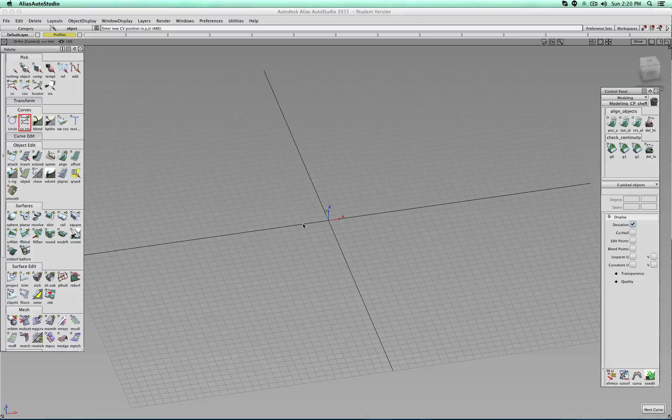I'm going to create myself a new layer. I call this one Profiles. And for example, set this one to orthographic. I go to the CV curve, degree 2. No, I go with 3. Okay. And then maybe Alt click and a side view.

There's my vessel. Then actually I can go ahead and maybe change those a little bit. Sculpt this one out a little bit more. Currently I'm in 10 millimeters, so I can use the grid kind of like as a reference. And maybe this one for convenience and snapping to the grid. Perfect. And then I have to reset my pivot point, for example here, and then I can actually do a revolve.

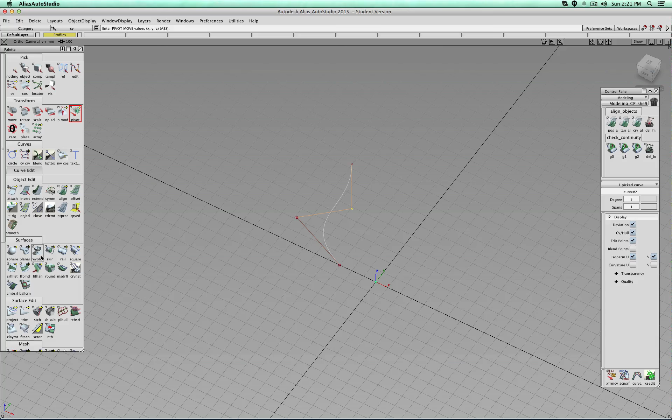There, Z and local axes. Let's take a look. There's the part. Maybe I should sculpt actually the shapes a little bit more. This, for example, if you see, is maybe a little bit higher. So let's stretch this one out. This one maybe, for example, is inwards a little bit more. There. And this one maybe we move up a little bit as well to there.

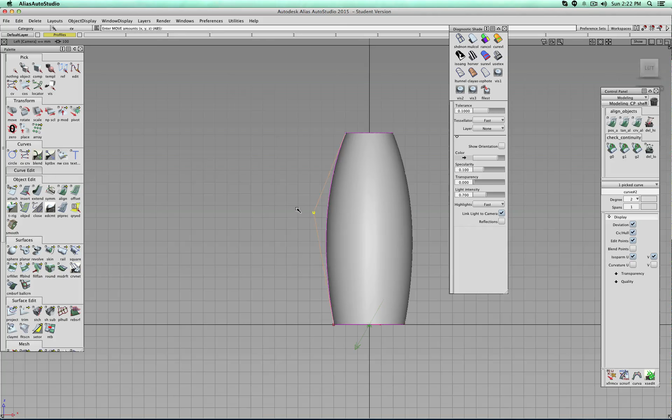This one is actually a sharp corner. I simply decide to up here have a nicer transition. If, for example, you don't want that, well then just change the degree to degree 2. You see, that's really nice. Changing the degrees, simplifying the shape, and then just then resculpting.

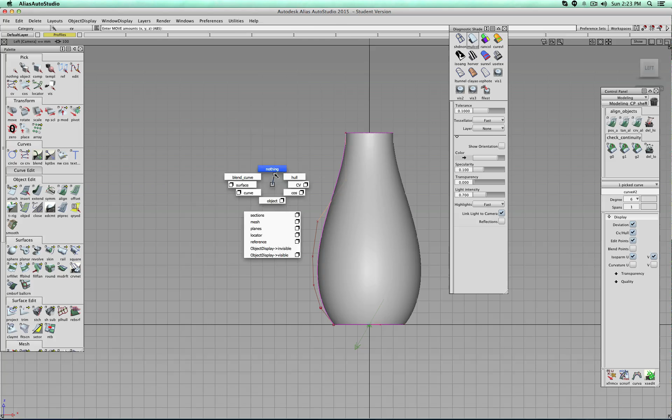At this point, actually, I would like to introduce you also to the idea that once, for example, you have a curve like this one, and you change it to a higher degree, you see it redraws the same curve, and you get more control points. So, for example, the lower part is the same. If, for example, I do it this way, and then I could, for example, click on this curve, move, maybe snap it. So you see now I changed just upper part, and because I changed the degree afterwards, this curvature remains exactly the same.

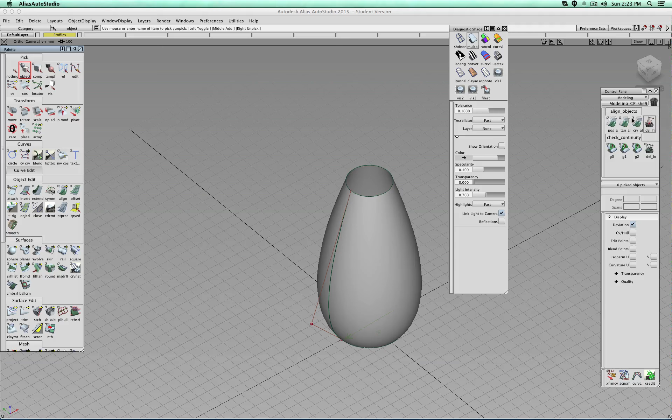But actually, let's go back to maybe this one. Okay. Now, this is actually maybe okay for the moment. Let's take a look at the top. So to quickly get an idea how this one might look like, I control click on this path, go up, go to the side, go to the side, and always snapped to the grid. Well, maybe degree 4, single span, accept. Just have to rearrange some of those points.

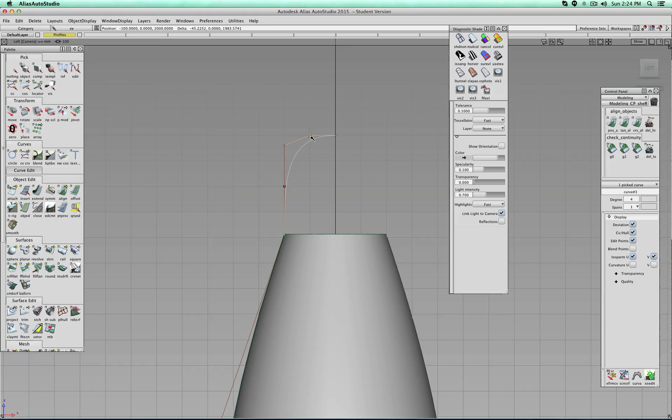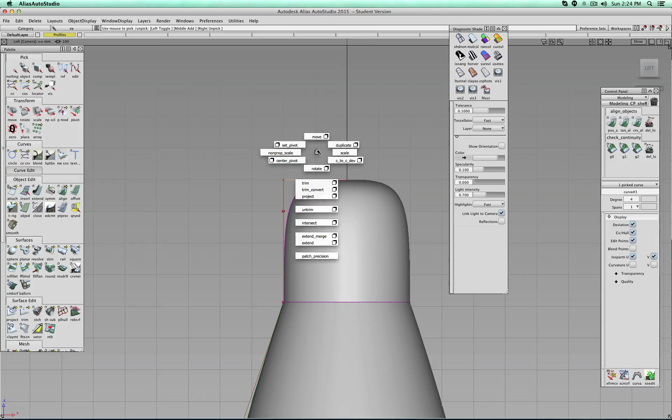So I just made a really rough mock-up of a cap. I have to set the pivot point here as well. There, revolve, spacebar, check the surface, and maybe to get some ideas I could sculpt this a little bit more. See, I'm tightening the corner, I'm stretching, flattening those lines.

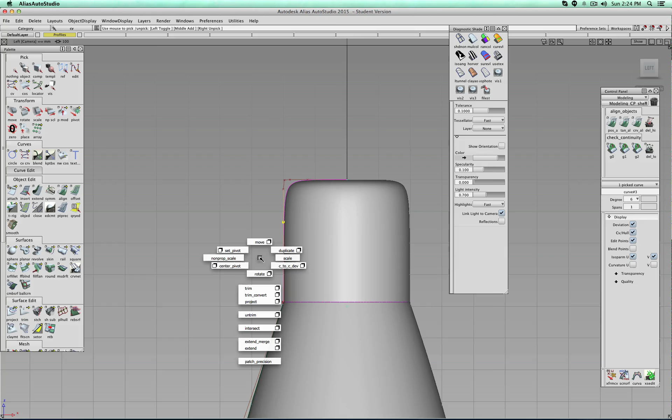For example, here now, if we go to 4, 5, 6, 2 more points, just to show you, because I have more points added, this line actually now remains straighter. And just pull these points really closely. So I'm actually sculpting by hand my transition. There.

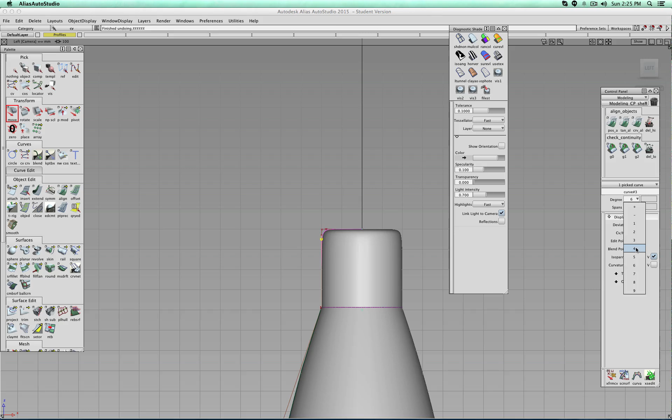Just undo it. And I just thought this might be good to see. Let's go to 4. Well, everything is wonky and just have to rearrange them, which is pretty easy when you use the snap. There. Okay. Good. So this is kind of like our base surface.

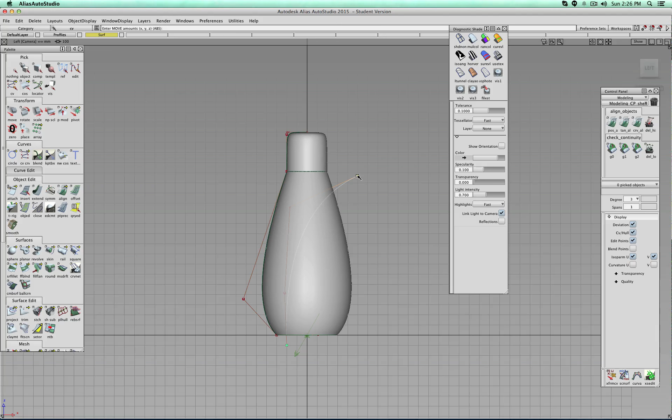Let's take maybe a look at this arc. I could probably easily sculpt this out of 2 degrees surface, curve. Here I'm just moving my surface to there. Let's go to wireframe mode. And I hope I don't really see that edge, so I go back degree 2. And maybe click, click, and click. Let's compare. Actually, maybe degree 3. Maybe, yeah, this seems to get closer to kind of like that arc. Okay, so that's, for example, now the side arc.

Now let's take a look at actually how we can quickly get a study, quickly a model for the internal surface. Now you see that the bottom part, this offset surface and the original surface, seem to have the same position. So probably this is one surface and the internal surface is the same curve, but then to the top it changes. So what we can do is actually take this curve, copy and paste,

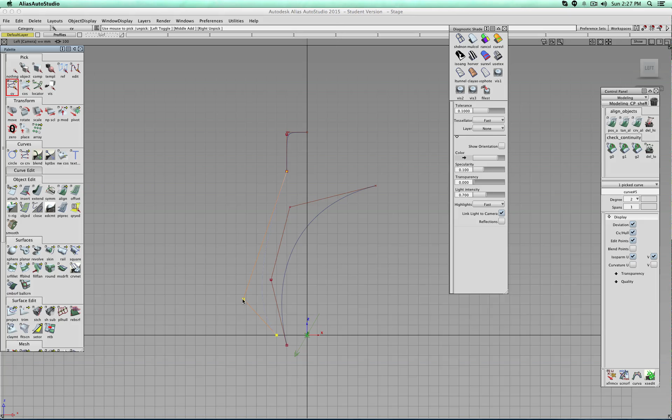and then right mouse button, I should be able to deselect those CVs. CV5, here nothing, okay, there. This is 5, so that's the last curve I created. And move it in. So there you see like how those curves start and blend. And because I only have 3 control vertices, the change happens quite quickly, but also nice and evenly. So maybe I push it back to something like this.

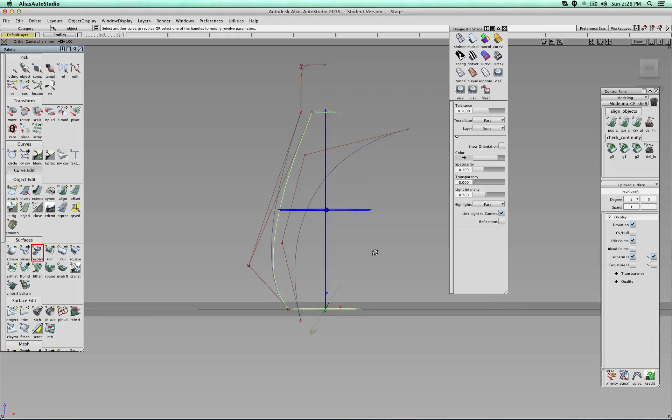Okay, so that's my profile for my offset. So I do the same, revolve. See, because I copy and pasted, the pivot point was the same. There is my surface, nothing, object, and move this one onto the surface layer.

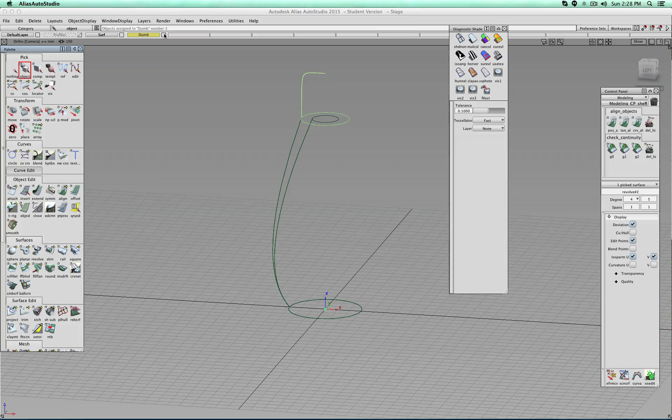So there's how they're intersecting. This one actually, I might put onto a dumb layer, so I don't have to see it or hide it all the time. Let's go back to here, and in the next step, let's take a look at the curves that, for example, create those trims.

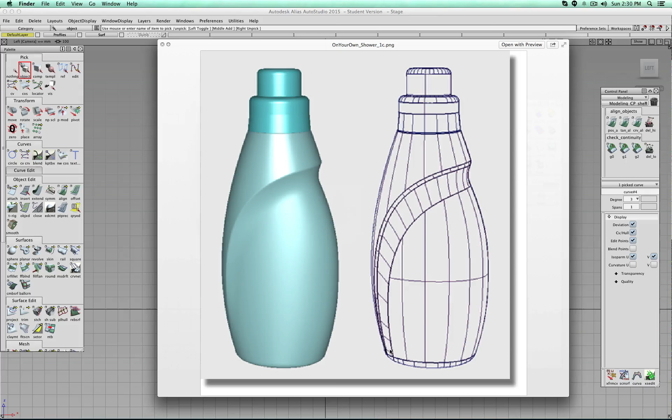So let's go back to here, and you can pay attention to, for example, the distance, and it looks like it is nearly an offset curve, but also down here the distance gets a little bit smaller. So there are two ways how we can do this. I can make an offset. This way, for example, I get an even offset. Maybe let's do this. Spacebar.

And then in the secondary step, I select this point and, for example, move it down. This is going to break the construction history, which is fine. There. And maybe this one, I kind of like along this line, move a little bit. There. There you see how this progressively gets closer or bigger. Great.

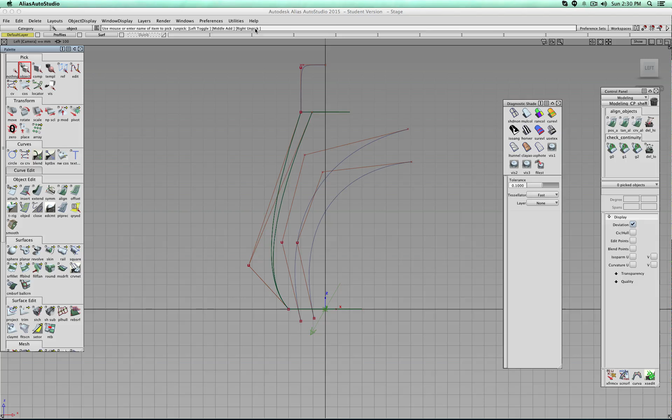So this actually means that we now are nearly ready to do some of our trimmings. So I'm going to save. And let's go to project and curves on surface, view. I can actually simply select Y because you see I'm projecting along the Y axis. So I can, for example, click my bottle, spacebar, this line, spacebar. I can click this bottle, spacebar, this line, spacebar.

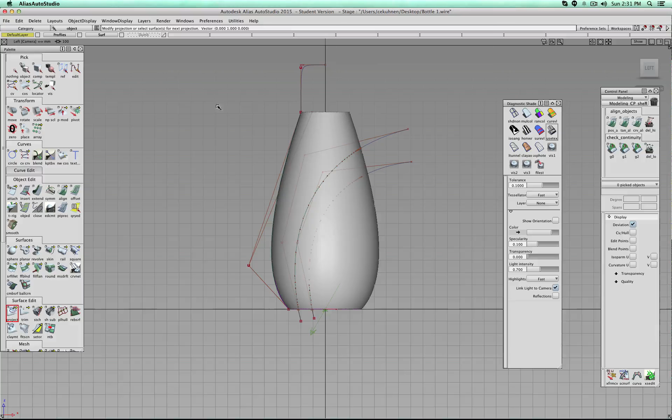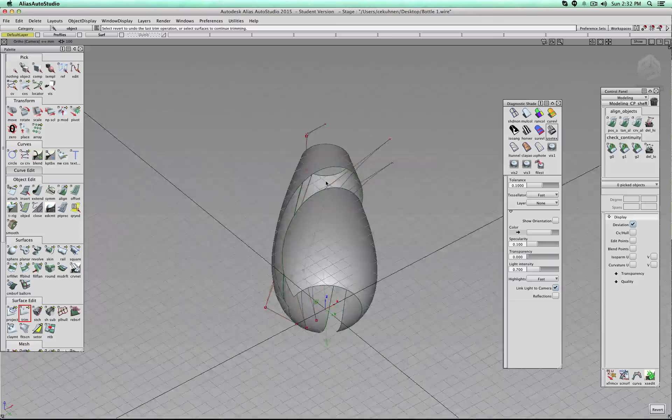So you know there are my curves on the surface. And again, very important, the curves to project and later cut have to run from over an edge to over an edge. And then we can actually go to trim. Let's take a look what setting I have. Trim, okay. Click and click and say discard. Click and click, keep. So now there you see I have those two open segments.

Also, you notice actually that I drew this profile and trimmed over an area of the surface where I do not, like here, have a green line which represents a surface edge. Again, think about this as a sheet of paper. It starts and is being bent around this way. You don't want to trim over this edge if possible.

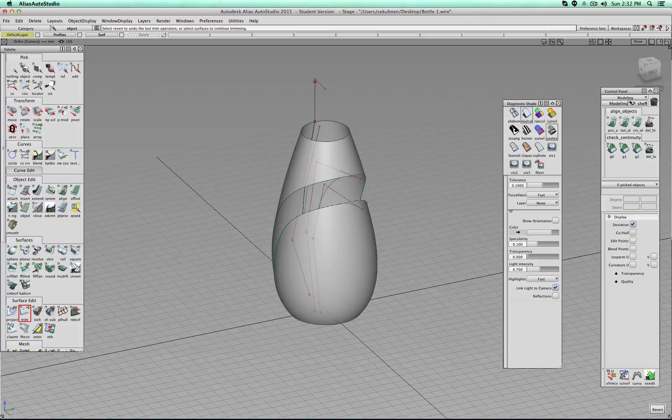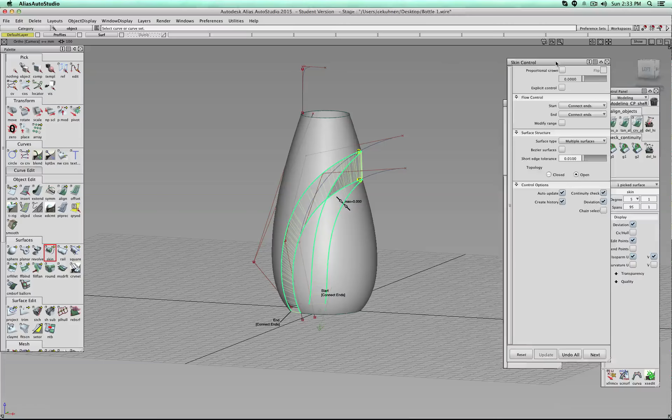So then, for example, to be quick, we can make maybe a simple skin. And this should work. Click and click. There. And you see there are a lot of lines. Those are spans. Currently you see this has 95 spans. So just as a warning, this is for prototyping, okay? But it might be a little bit complex or dense.

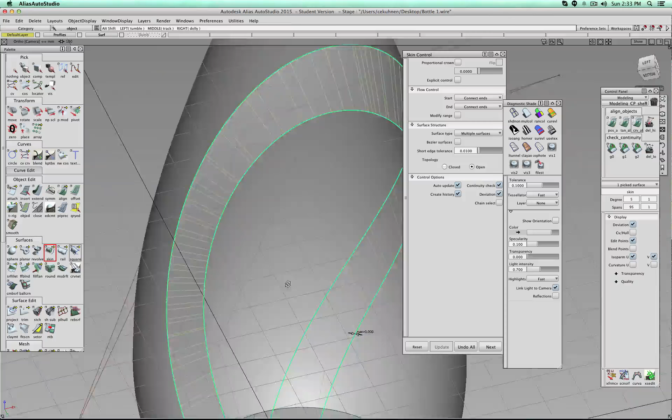So this is, for example, how we make a very simple linear blend. And then we could round those edges either with the surface blend or the round tool if you want quick access. The problem with this approach, as you see, this is actually very straight. And maybe you would like something more soft. So instead of using this approach, I'm going to use the surface blend. So click and click. And it might take a moment.

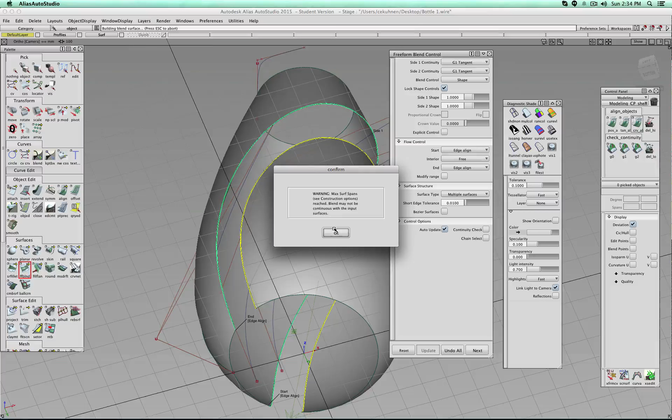And yeah, max span, because we are way over the spans we should use. We are over 100. So this is, again, okay for prototyping. Not necessarily really good for production. But the thing is, making production models is very time consuming. And for prototyping, maybe you can get away with less precision. So you basically pick the approach which is best for your purpose.

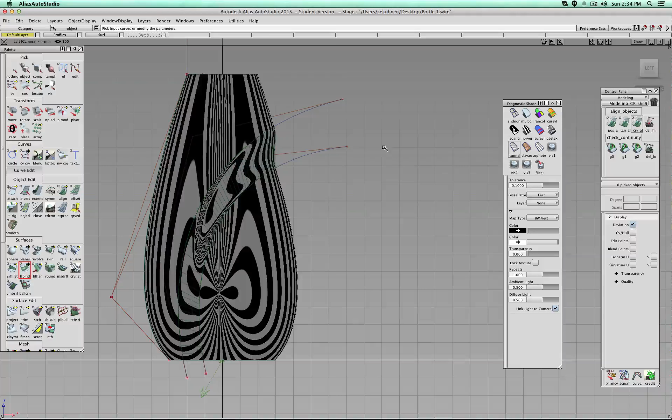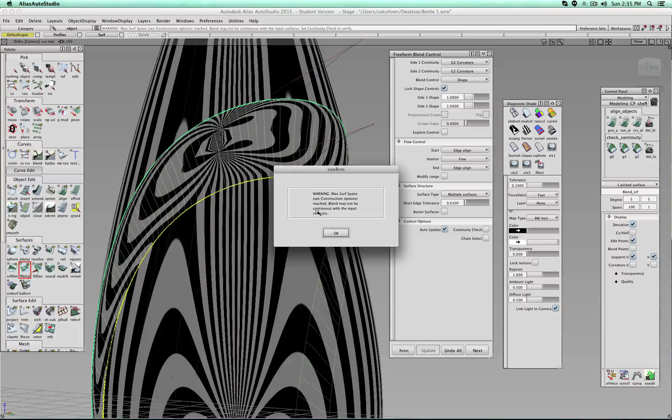But you see, I turned on my curvature graph and these lines somewhat flow. So this is not too bad. We could maybe clean up this blend a notch by maybe setting this to G2. And another G2 up here. You see now the zebra lines flow a little bit better. Okay. So that's the way it looks.

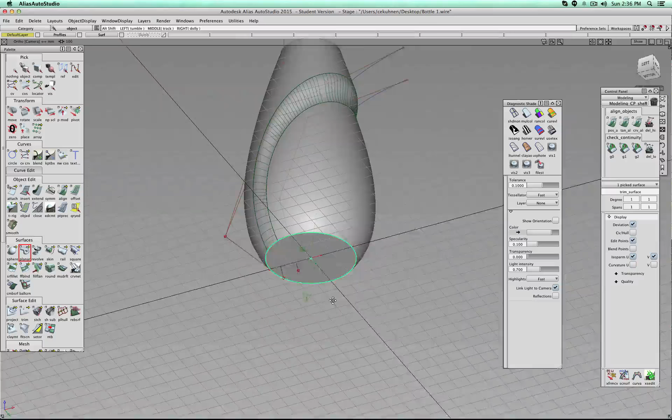Okay, so now we could, for example, fill the bottom area, planar. So let's take a look how this looks, and maybe in this case let's take a look at the round tool, and I'm going to adjust this radius to something like this. The round tool is a nice and quick function, but it's not really the best result in terms of surface blending you get. But again, for maybe some quick prototyping, really sufficient.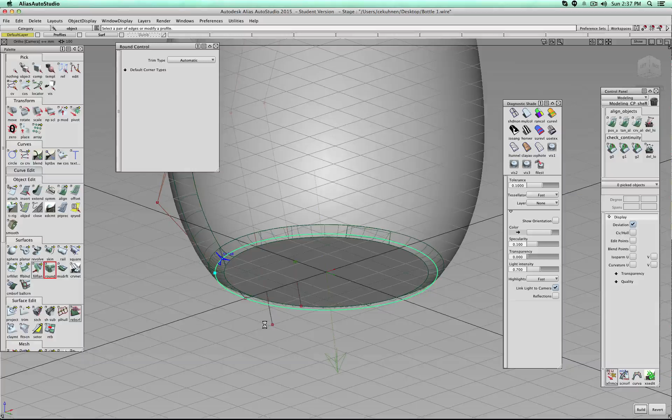Because otherwise, you rather want to build everything out of individual surface fillets, which will later look better, but requires a little bit more refining. It's also a little bit more complicated. So there's actually now our surface. Let's take a look. And what did I do? How did this one get moved? Okay, build.

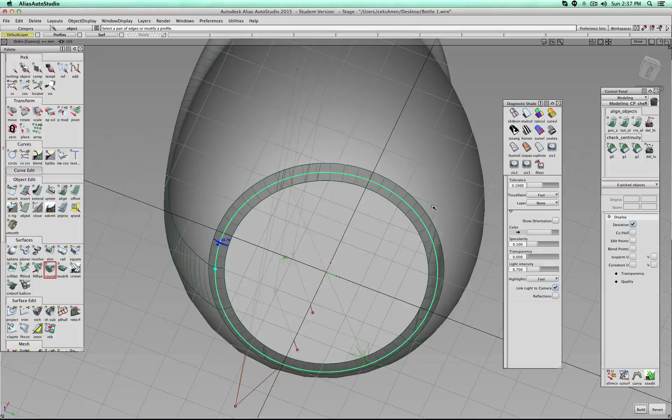Now this is interesting. Let me do this again. Round. There, there, there, there, and there. Spacebar. Okay, I must have accidentally somehow moved the part. You also see that here the round tool, for example, shows a lot of spans. Let's turn on this one.

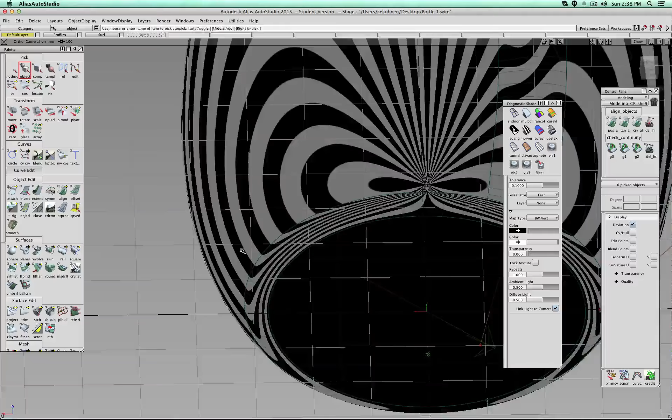And there, for example, you can see that the zebra lines line up a little bit, but they change the direction pretty quickly. So it's only G1 tangent. But for example, if we put this one onto the MakerBot, you won't really see the difference anyway, because the printer doesn't have a good resolution to really show that. Then show the cap.

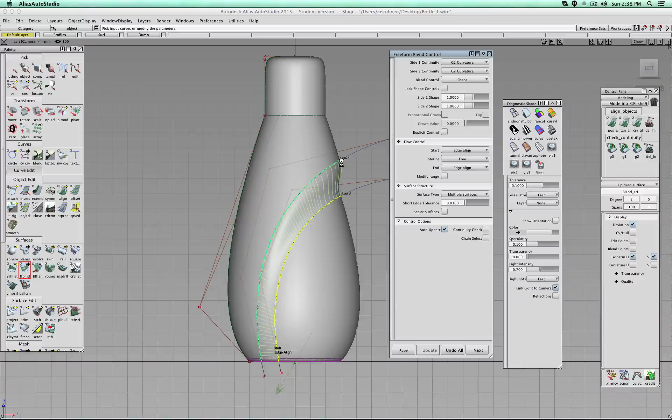Let's take a look at here. And there we are. So you see, this actually looks pretty good. This is quite close. If, for example, we would like to adjust some settings, maybe have a smaller rim here, then maybe we could go to Query Edit, select this one, go to here, side 1. Side 1, I have to lower the value.

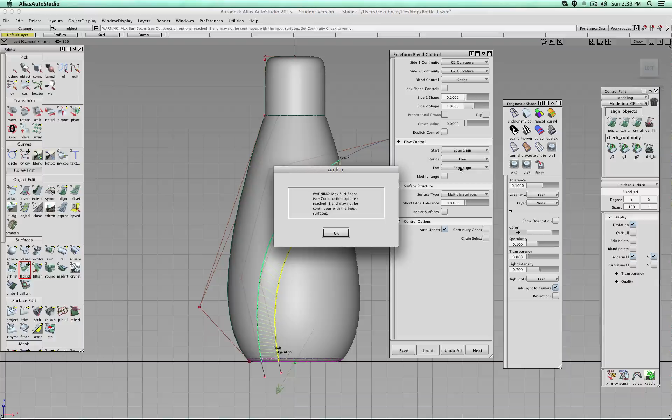And you notice that actually I have to wait a lot for Alias to do those calculations. So if this, for example, bothers you, turn off the auto update and then later turn it back on. To tab. Okay. There you see, for example, that this is a bigger transition, a smaller transition. Let's take a look. Yeah. Okay. So that's, for example, how we make this in the process of a quick prototype.

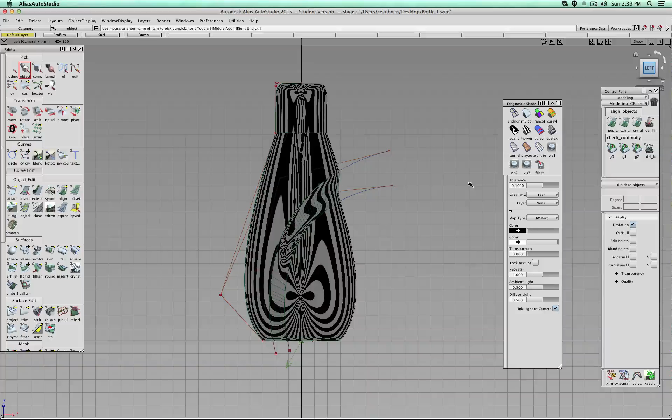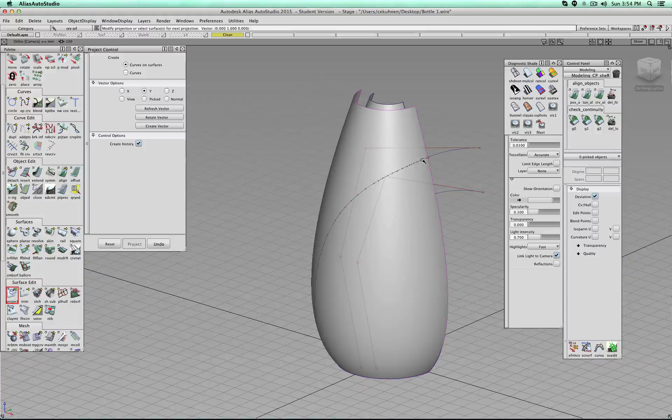Let's take a look at how we can actually rebuild the rather complex surface we had before with a better surface. So first I'm going to project curve on surface, this curve. And before I do this, I would like you to pay attention to it. We have 1, 2, 3, 4. It's a degree 3 curve. Spacebar. And take a look at how many points are on that curve on the surface. Now the problem is this is a very simple curve, but if you bend it along 3D space and it has to perfectly sit on the surface, you need more math, more geometry, more control points.

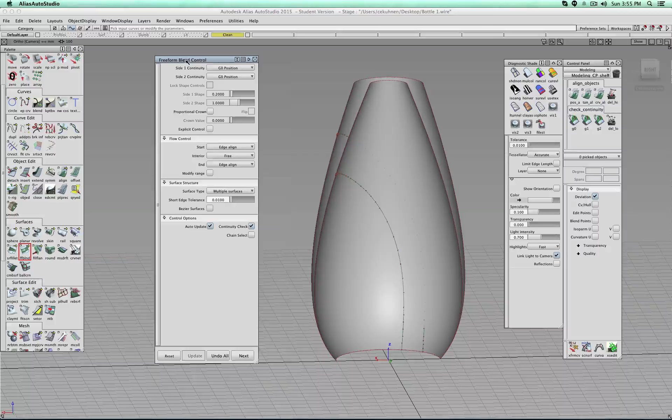And let's select this surface and this curve. Great. Okay, let's hide those for a moment. Invisible. And now, previously we simply trimmed and then we put a blend in. This time we're not going to do this. We're actually going to go to the freeform blend and say edge to edge. And you see we have 16 spans.

Actually, at this point I would like you to turn those on. That tells you in terms of continuity the G0, so position, they're all green, which means the surface is good. This blend surface really matches the edge on the surface. Now, we could, for example, go to something nicer and say G2 and G2.

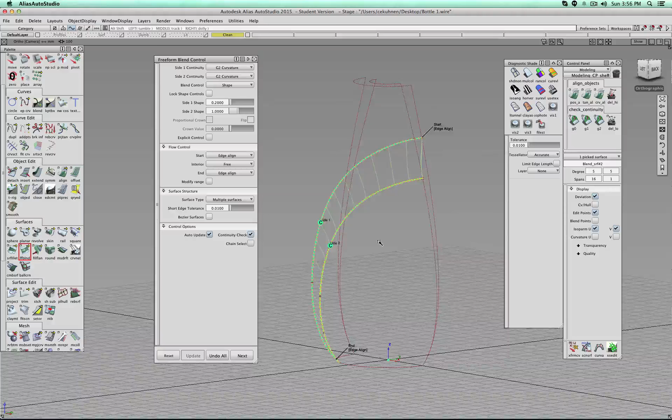And we have like 16 surfaces. You see, this max span problem is not coming up. But this is still a pretty dense surface. We have 16 spans. I don't really want that necessarily to happen. So what we can do, see, this one doesn't really change much. For example, now we see like 91. Crazy, way too much. So let's go to multiple surface.

Oh, great. Hold on. Let's go back. So I decided to make a single surface. You see this one is yellow. So it's position. It's not curvature anymore. So this is not really good. What's happening here is, while this looks like a very simple arc, we don't have enough geometry to really make this lower end of the blend perfectly fit on the inside surface.

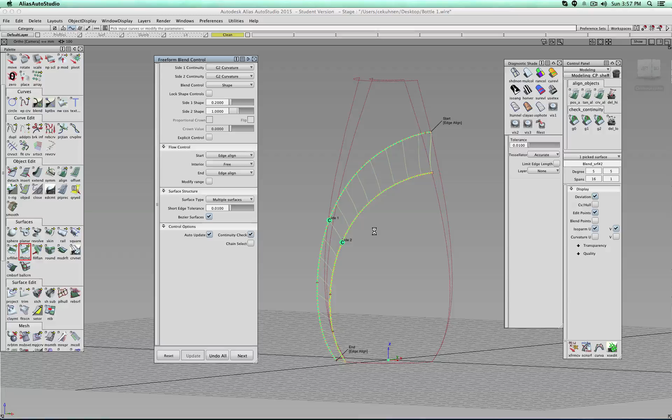So what you have to do to get really good surfaces is you have to break it apart into multiple surfaces. And if you click this Bezier surface, you will see now that actually we have 9 surfaces, all degree 5, single spans. See, there are no spans, and they're all nicely aligned, G2. So this is really good.

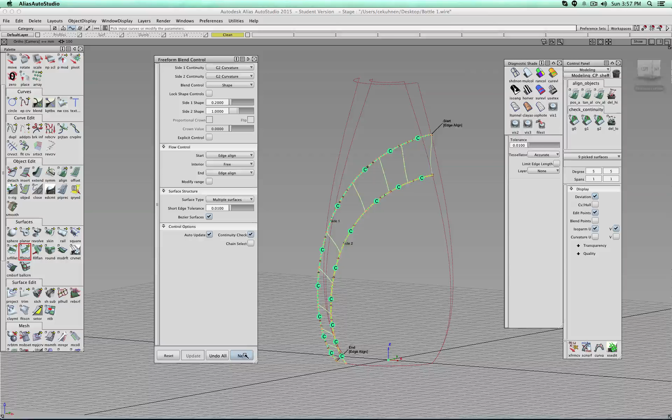Let's click next, nothing, an object, and go to the control panel and go check continuity. So for example, let's check this one. Position is fine, G0. Tangency is fine, G1. Curvature is fine. So this way also the Bezier surfaces, so the single patch surfaces along this curve on surface, are perfectly G2 to the bottle surface, and to each other they're perfectly G2. So these are really nice surfaces.

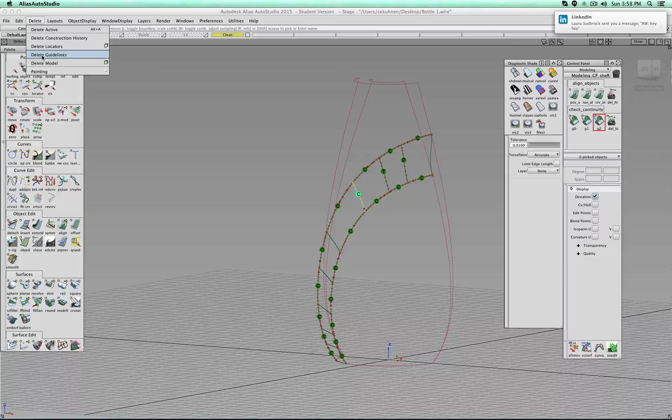So we can delete the construction history. And I meant, sorry, the locators there. And I'm going to, for example, select everything. I'm going to delete construction history. I'm going to select those curves, delete. And now it's actually time to trim. And what we're going to do now is go to trim and turn this 3D trim on. I have it set to normal.

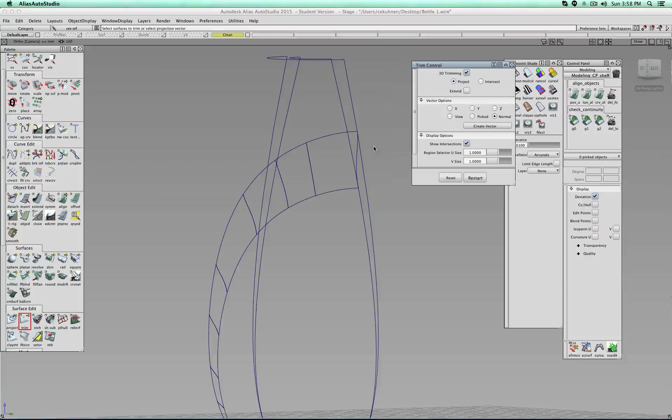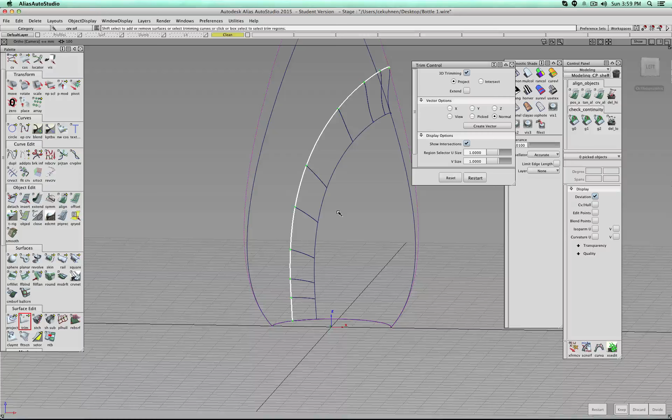And now we go to this surface, spacebar, and then I click, click, click. You see the green pluses, that means there are good connections. The red means it doesn't cut really through the surface. This is bad. So we have to continue selecting all those edges. Now you see this one rests on an edge of the bottle surface. Perfect, spacebar.

Then I can click the surface, spacebar, and you see it actually got cut away. Let's do the same for the inside. So trim the surface, spacebar. Then I'm going to select all those edges.

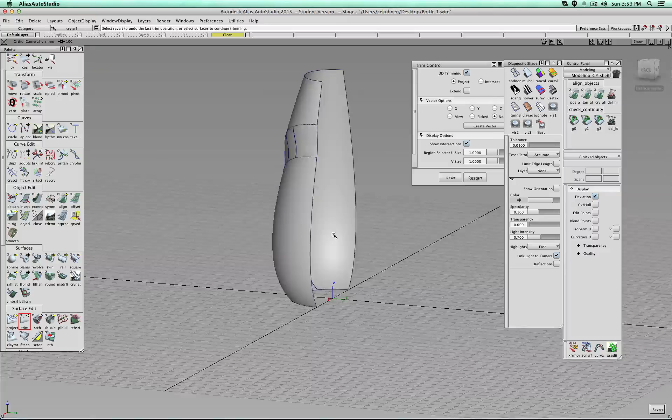Click the surface, spacebar, keep it there. So you see this is a really nice and clean model. Let's turn on the curvature graph, accurate. I don't know, maybe can we go a tick lower? Might take a second.

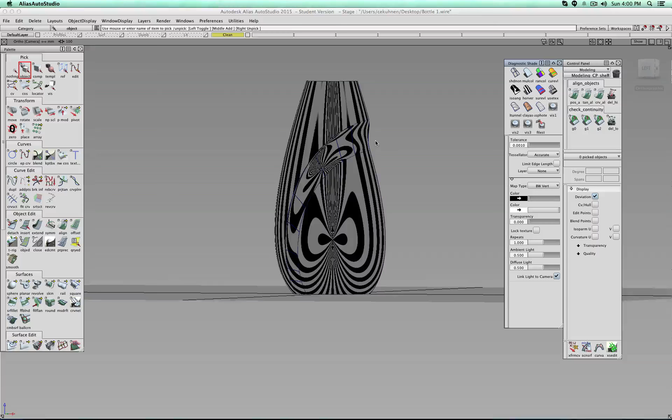And I might have crashed Alias. Let me pause for a moment. Oh no, here it's coming. Because I hear my computer working. Oh, there it is. Perfect. And note to myself, don't do this again because this slowed down Alias a lot. So let's go back to 0, 1.

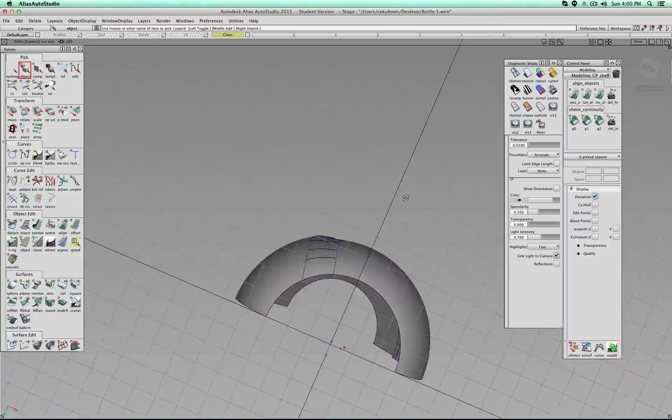But there you see if you rotate, we don't really see much of a problem. The transitions are really nice and smooth. So this is actually a really good quality surface.

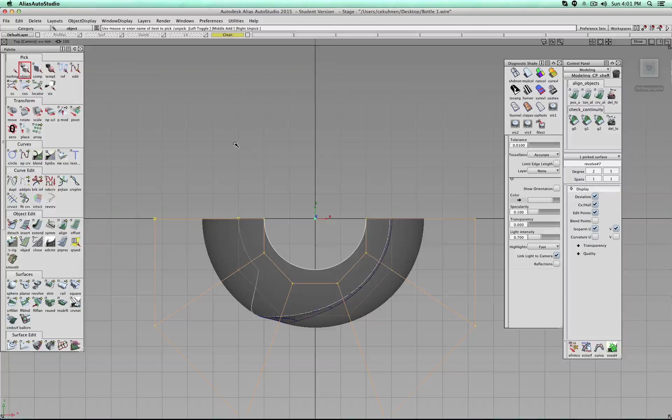Now because everything was built as a half and I did the 180 revolve, that also meant, for example, if I select the surface and show you the control points, go to top, you will see that, for example, those points, they are perpendicular to the mirror axis. So that means if I turn symmetry on, we also have a perfectly symmetrical object.

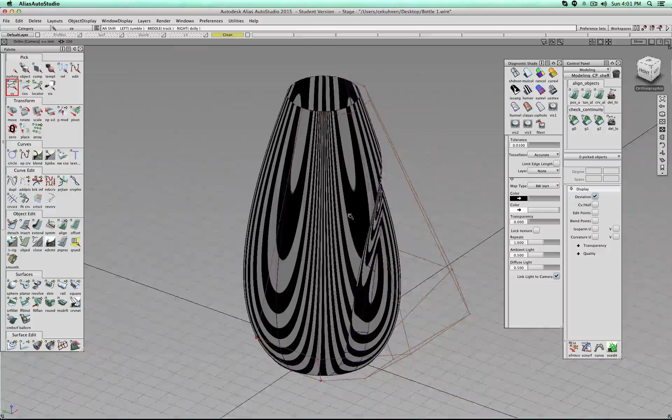So we do not need to deal with implied tangency there, because the half arc I created for the revolve, or through the revolve basically, really is perfectly capable of being mirrored without producing any kind of kinks or sharp edges. So maybe here, let's turn those back on.

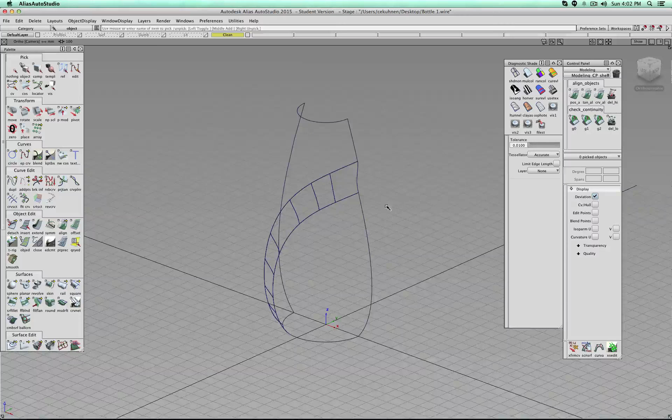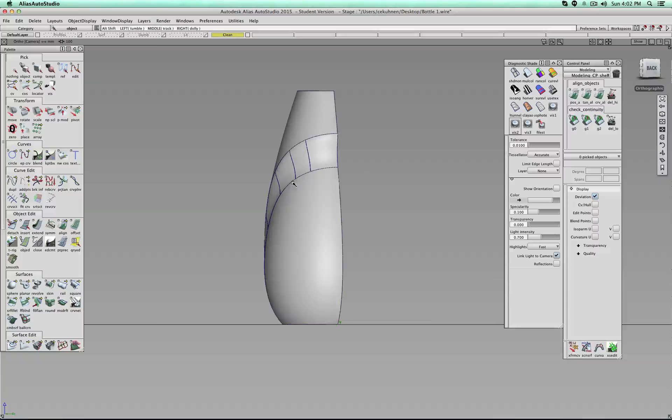Okay, that basically is the step. Then how, for example, you can quickly take a look at some preview models, preview designs, sculpt around. And then once you're done, maybe actually rebuild the design, but with cleaner, better controllable geometry. So this one, for example, we could give to an engineer to continue working on.

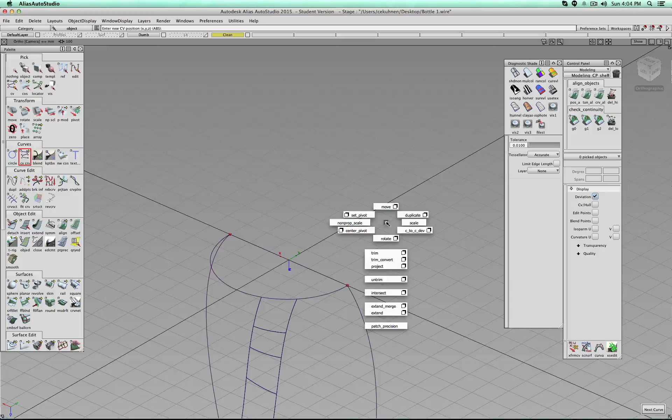Now to finish this model, for example, the top part, the cap we can keep, but actually our lower part here is still open. I would like to continue working with half a model. So we could, for example, Alt Control click and Alt Control click, draw in a line. And then actually what we will do is we go to planar curve, select those edges, spacebar, and for example create this cap surface.

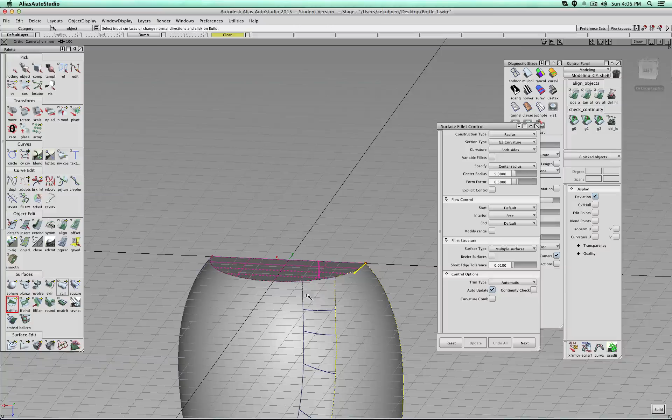Now we go to surface fillet, and I'm going to set this one also to G2 because that's a nicer, more organic rounding. Click on this surface, then click on all those surfaces that, for example, will touch the cap surface. Can maybe adjust this rounding a little bit.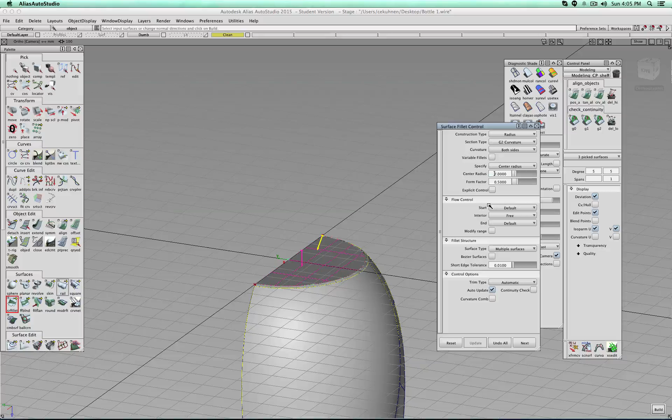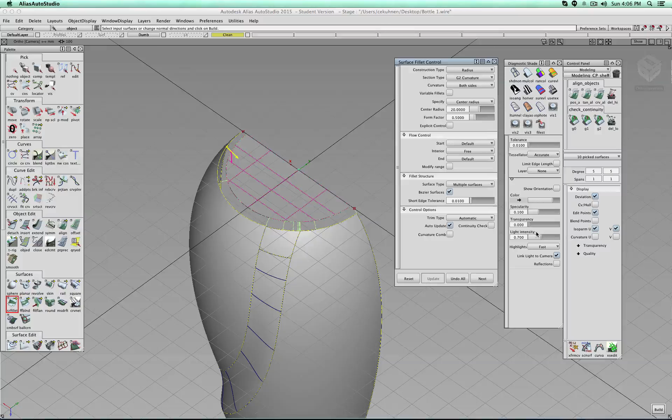Let's see what we get. Press spacebar and maybe let's make this one 20. So it's a bigger rounding. So let's take a look and you see that's a pretty good transition. So for example, also here, we could now turn on the Bezier surface, maybe check continuity to make sure that not only everything we see looks good, but actually also really works good.

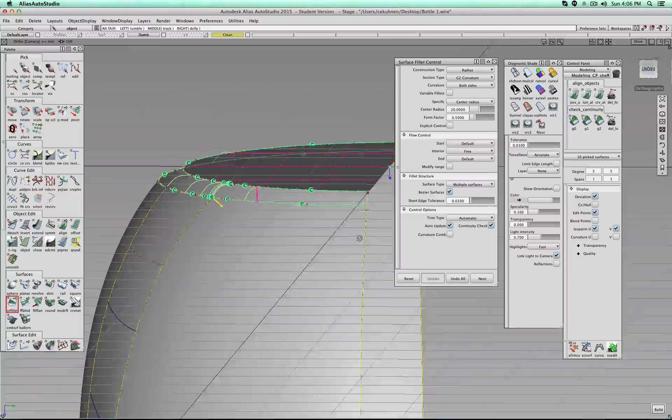Now here actually we got a lot of surfaces, but let's for the moment keep it like this, because again, I hope this shows you that as simple as stuff sometimes might look, the math behind it to create all these surfaces is actually quite complicated.

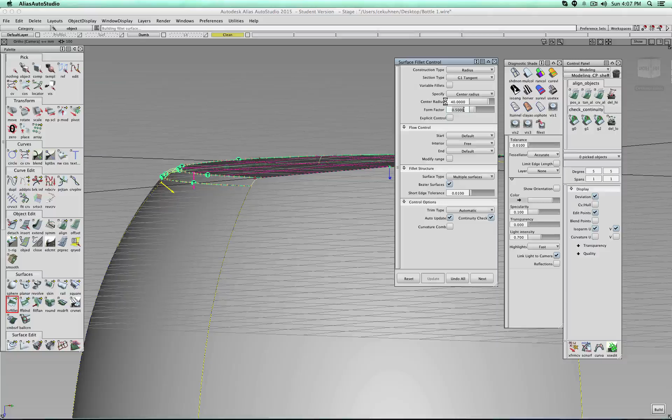Now, because this is actually a lower edge, the bottle will always stand on it. I decided simply to go back to G1. Probably will be sufficient. Maybe change the radius a little bit more. There. Actually, I continue having those two, so I guess it doesn't really make much of a difference. Oh, actually it does. So yeah, let's keep it at G1. Okay, so next.

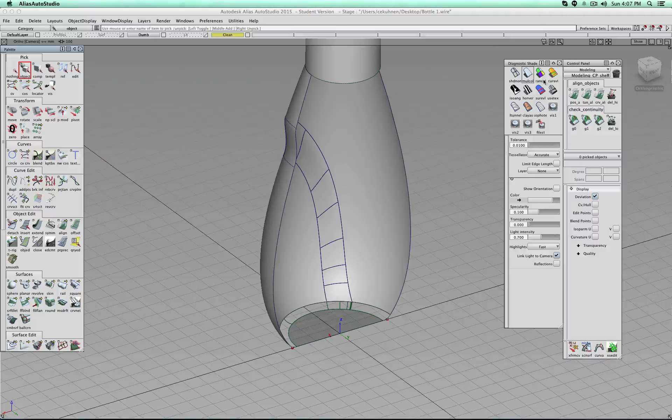And what you see there, the T, etc., those are called locators. So I can delete the locators. And for example, you have locators here. So I could go and say, is this G2? Oh yes, it is. Is this one positional? Of course, because it's also G2.

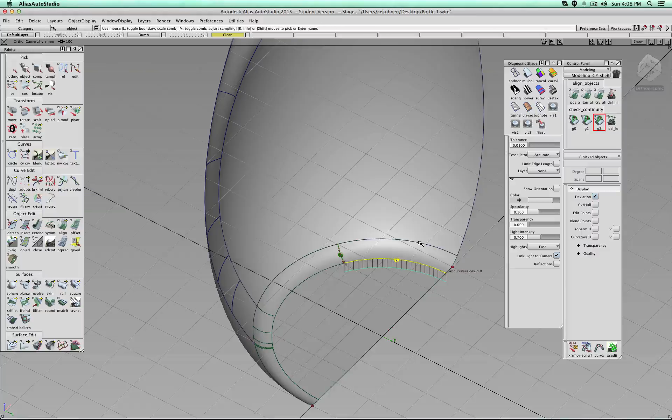Now let's take a look down here. This is, for example, not G2. See, this is only G1. This is only G1. This is G1. This is G1. So those are green. Those are red. But you see in between, actually, it is G2.

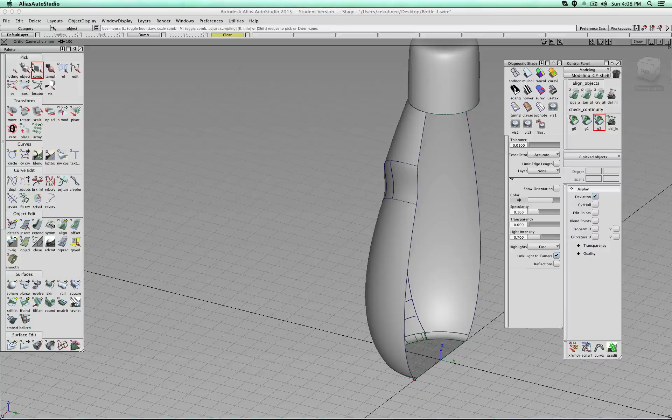So let's delete the locators, because what I would like to do now is I'm going to select all those surfaces. I'm going to delete the construction history, because I assume this is all now done. For example, if I turn on the symmetry, I have the other part. If actually I would like to have real geometry, then we go to symmetry, create geometry.

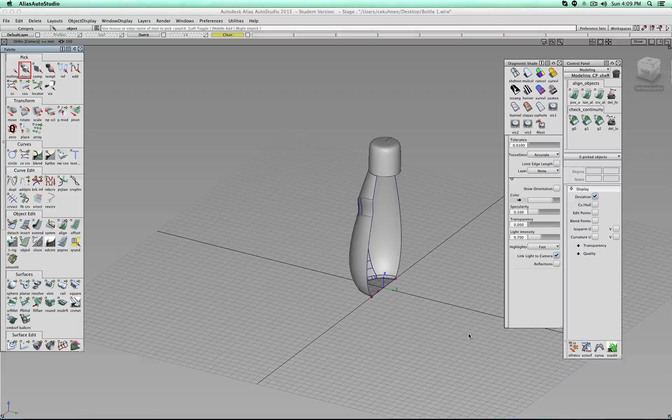And interestingly, it didn't do it. So let's try this again. No, that was the way how it works. Layers. Oh, I did not have it clicked. So only because it's yellow and you're working in it, you still have to select the layer. Create geometry. There, and then symmetry gets turned off.